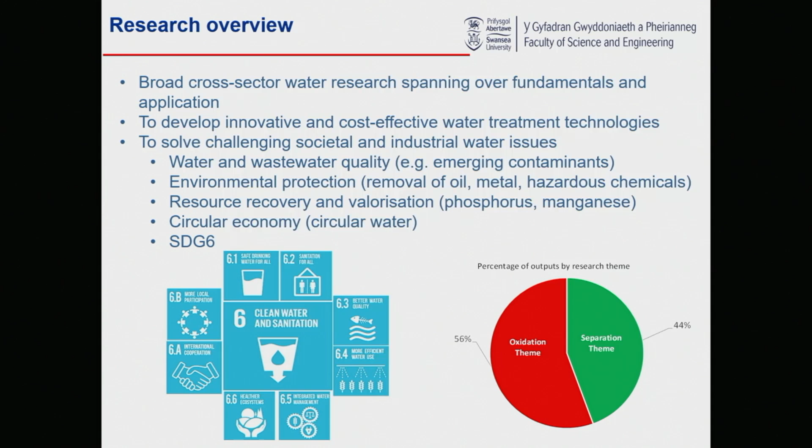The aim is to address several challenging issues related to water, such as water and wastewater quality, the emerging contaminant problem, environmental protection. We did several projects related to oil removal from industrial waste, looking at hazardous chemicals, metal issues in water. Recently, over the past couple of years, I had quite a good grant looking at circular economy and valorization of waste - that's a capital fund grant. So we have a range of equipment that we could use for this purpose.

The area of water comes under the umbrella of SDG 6, if you are familiar with the Sustainable Development Goals by the UN, and number 6 is related to water.

Our research lab covers fundamental and applied research, focusing on several oxidation techniques, mainly ozone. I've been working in ozone for many years, and I'm associate editor of Ozone Science and Engineering, the only journal that focuses on ozone research, covering European and African research related to ozone. We apply these technologies in water and also to protect the environment.

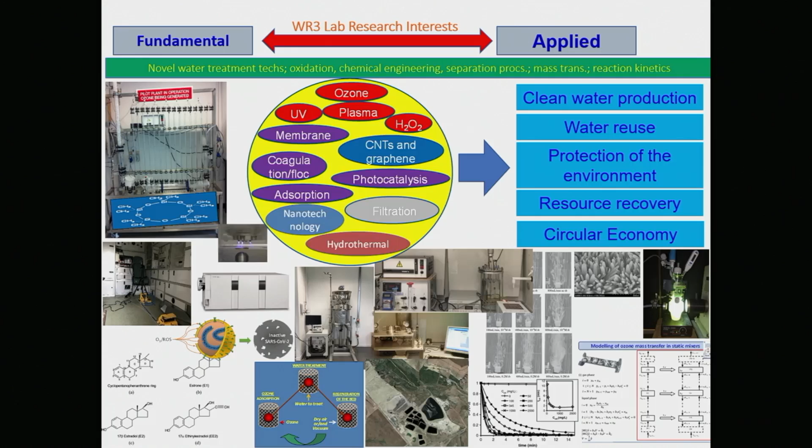This gives you a snapshot of some of the projects and equipment we have in the lab. During COVID-19, we tried to apply ozone to address the issue, and that received significant interest from the media and other stakeholders, looking at application of ozone to disinfect ambulances and buildings.

This gives you a snapshot of the areas we work on in advanced oxidation, like photocatalysis, catalytic ozonation, hydrogen peroxide, and non-thermal plasma, which I'll talk about later. Separation: membranes, filtration, coagulation, flocculation, adsorption, ion exchange, and so on. There are a number of techniques we use under the umbrella of separation processes, and these are snapshots of papers published in those areas.

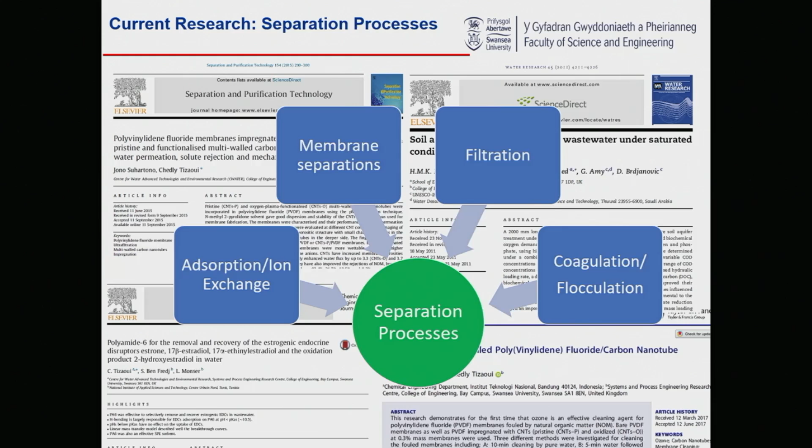Water is vital for life. We know that, all of us. We can't argue about it. It is also vital for our food, for the production of our food. It is extremely important in the manufacturing industry.

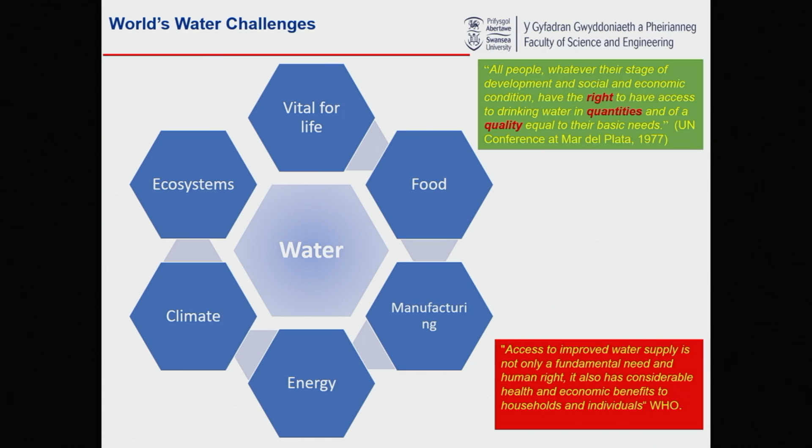Energy - the water-energy nexus is very well established. Water affects energy, energy affects water. Climate, ecosystems - and water, on a larger scale, is a human right, also linked to the economic benefit in a country. If a country is lacking water, the economy in that country would be struggling. So water is important for life, it is a human right, but also it has a huge impact on the economy in any country.

1.7 billion people live in water-stressed areas. By 2050, predictions suggest 5 billion people could be affected by water shortages across the world. 80% of the world's population live in areas with threats to water security, and that threat can be the availability of water, the quality of the water, or flooding.

In the UK, although we have plenty of water, there are risks associated with flooding. 3 in 10 people of the global population lack access to safely managed drinking water, and worse, 6 in 10 people don't have access to proper sanitation. That's extremely important because the diseases that can result from this are very significant. There are nearly 2 billion people who still use sources of water contaminated with pathogens, and 1 million people die every year because of that exposure.

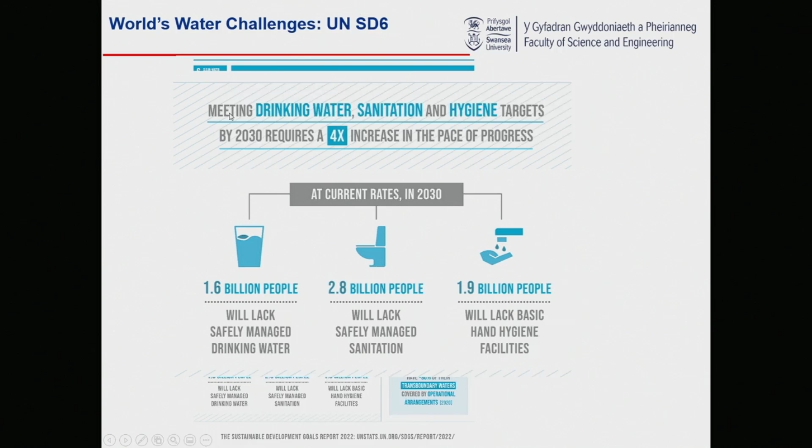If the pace goes as it is now, by 2030 you will have 1.6 billion people still lack safely managed drinking water, 2.8 billion will lack safely managed sanitation, and 1.9 billion will lack basic hand hygiene facilities. And all that is related to the water. So there is a lot to do really in order to achieve those targets set by the UN.

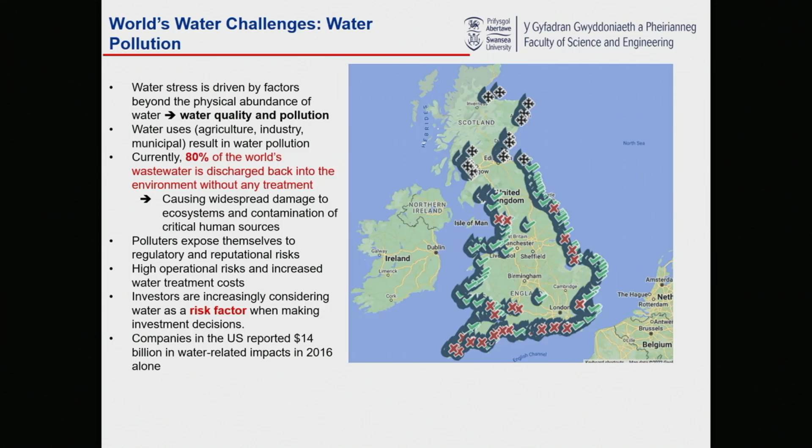It's not only Africa or parts of Asia that are affected by water, it's everywhere people are affected by water. In this map, for example, it shows the level of pollution that exists in beaches in the UK, and you can see there is quite a significant number of beaches that are polluted. On a global aspect, 80% of the world's wastewater is being discharged into the environment without any treatment, and you can imagine the impact that would have on the environment.

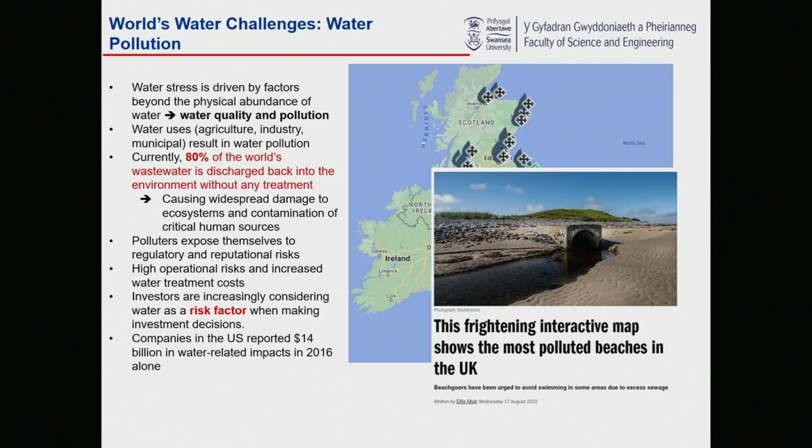Another aspect of water: investors, before they invest in whatever new project, they consider water as another risk factor they need to look at carefully, whether it be availability or the quality of the water. In the US in 2016, companies reported 14 billion US dollars in water-related impacts. So it's quite significant, whether they polluted the water and received fines. All these negative impacts, if you count them, cost the companies 14 billion in 2016. So that's a general overview.

I'm going to touch base on one aspect of the challenges related to water, which is the micropollutant challenge or issue. What are they? In the world, we have over 350,000 chemicals and mixtures that we use almost every day. They are registered, they are produced, and they are used. As you can imagine, those chemicals will end up somehow into the environment, whether it be in the air and mainly water.

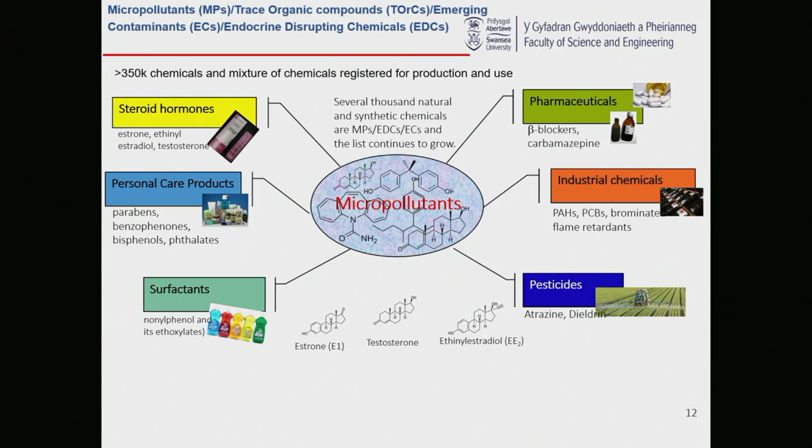So micropollutants are all those chemicals that end up in water. Generally, their concentration is extremely low. We talk about micrograms per liter and even nanograms per liter, that's 1 billionth of a gram in a liter. And these chemicals end up into the water. The list of those chemicals keeps growing almost on a weekly basis. There are new chemicals that are becoming important from an environmental point of view because of their impact in the water, or on humans, or the aquatic life in general.

So micropollutants are classified as pharmaceuticals we consume. The pharmaceuticals people take, maybe 60% of it, maybe 10% of it will be used by the body, and the rest will end up in the wastewater. Industrial chemicals, pesticides, the surfactants we use at home - every one of us will wash, and then those surfactants are classified as micropollutants because of their impact. Personal care products, and importantly, steroid hormones, which are very potent substances found at extremely low concentration, nanograms per liter, but their impact is quite significant.

Why do we bother about these? Because they cause all sorts of issues in humans and also animals. They can disrupt the endocrine system. They can cause feminization of fish, for example, which is in fact what triggered the research in this area. In English rivers, there was an issue in the 80s and 90s where fish were becoming more female, and they started to ask questions why. Simply because there is a discharge from a wastewater treatment plant that is discharging those hormones. Fish get exposed to the hormones and they became more female.

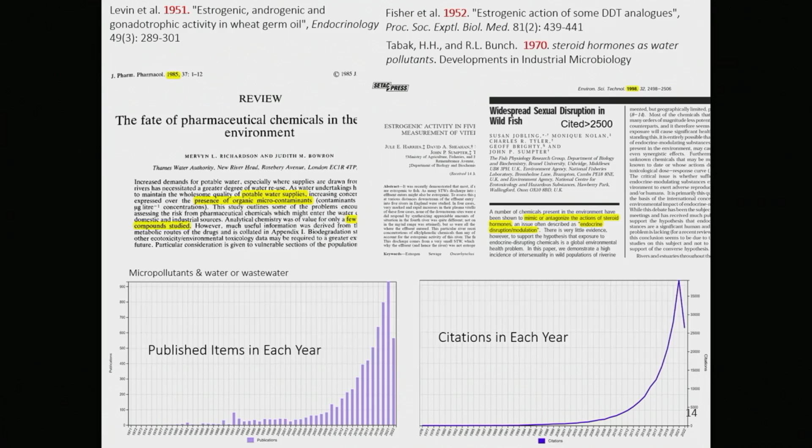One key point is that in the early 2000s - late 90s, year 2000, 2001, 2003 - there was huge development in analytical techniques, like HPLC and mass spectrometry. Therefore, researchers were able to analyze the concentration of these substances in water at extremely low concentrations.

So methods were being developed in this area, and research started to grow significantly. You can see the increase from the early 2000s for research related to micropollutants in water and wastewater, increasing at almost an exponential rate. There's a bit of a dip there, possibly due to COVID-19.

One of the papers I mentioned was about fish becoming female, by Susan Jobling, looking at widespread sexual disruption in wild fish. That paper is quite significant.

How do we get exposed to these substances, or how do they end up in the environment? All of us in the morning take showers, go to the toilet - there are hospitals, industries, etc. On a daily basis, whatever you do, you use water, and the minute you use water, these substances can end up in the water.

These substances get transported from homes to a treatment plant, a quite large wastewater treatment plant. Unfortunately, those wastewater treatment plants were designed many decades ago and were not designed to remove these substances. So wastewater comes to the treatment plant containing these substances.

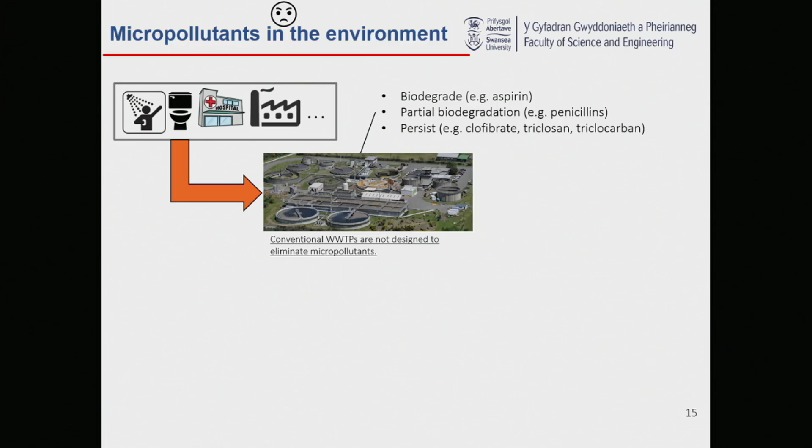Some of these substances may biodegrade there, and that's fine, like aspirin for example. Some will biodegrade but only partially - partial degradation. And some will persist; they won't biodegrade, nothing will happen to them. They come in and can come out from the treatment plant into the natural environment - a river, groundwater, or the sea.

There are other issues as well. Some industries, whether deliberate or by mistake, may discharge that wastewater directly into the environment. I make reference here to India - a lot of antibiotics are produced there, and in villages around the industries, no antibiotic can help the population, because the wastewater contaminated by antibiotics from the pharmaceutical industry discharged into the environment is quite significant. Bacteria are clever and develop resistance, so anyone from that village with an infection will find no drug effective against it.

Another issue is that some sewer pipe structures are quite old, like Victorian-type sewers. They have cracks and are not properly maintained, so they end up leaking their content into the environment as well. So the overall picture of all of this is...

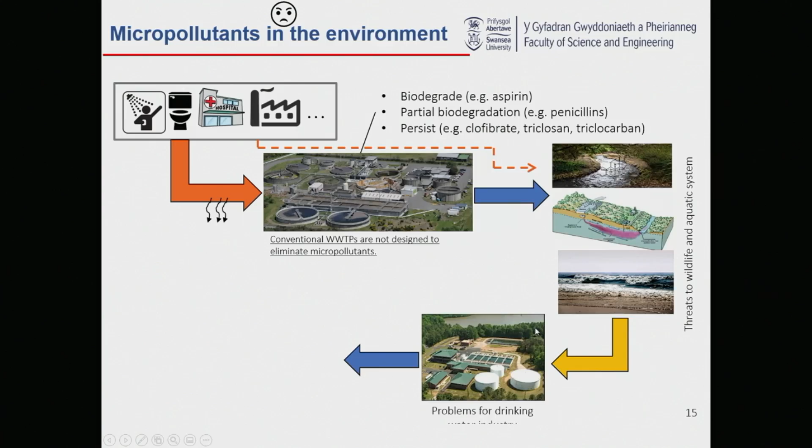You also get water from these sources to produce drinking water, and that drinking water is treated in a plant that is also not designed to remove these substances at the nanogram per liter level. Therefore, micropollutants end up in the water we drink. I'm not trying to frighten you here, but this is something that is happening, okay?

The other issue with micropollutants is that treated wastewater may be used for irrigation, to irrigate the food we eat. Those micropollutants, pharmaceuticals, antibiotics, etc., find their way into the food we eat. Also, wastewater biosolids have a lot of nutrients and are generally spread on land, which is another source of these micropollutants, so they may end up in the food we eat.

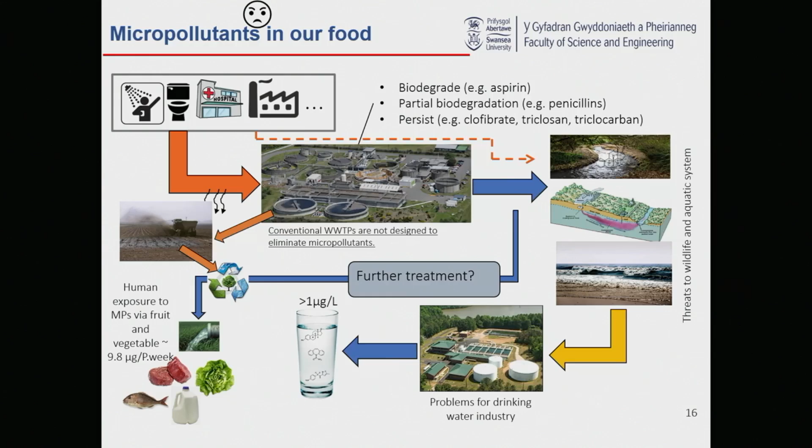Research from Spain shows that human exposure to micropollutants via fruit and vegetable consumption is about 9.8 micrograms per person per week. You may think in the UK we don't practice this, but we are not safe, because a lot of food is transported from Spain and other places in the world where wastewater is used to irrigate that food.

So the main conclusion is that wastewater treatment plants play a major role, or are the hotspot really, for the release of these substances into the environment.

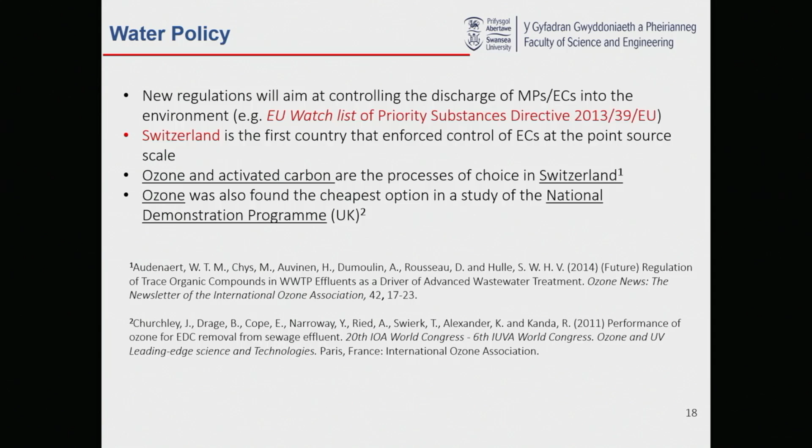If the problem is there, what's the regulation? What's the regulatory position or policy? This started particularly around the year 2000, when research started growing and the wastewater industry and regulators became aware of the issue, and regulations started to emerge to control these substances. But it really didn't go much further around 2007-8, when we had the economic crisis across Europe, which caused some delays. So the regulator did not really push for this to be properly regulated.

Instead, in the EU, they created a watch list of priority substances. The watch list basically asks wastewater companies to take samples, measure the concentration of a list of substances, and keep it on record. But they don't have to treat it, because if we aim to treat these substances in water, the water bill would become huge. So there's that issue as well.

However, the only country in the world that pushed for regulation around this is Switzerland, where their wastewater treatment plants have been upgraded with new technologies to remove micropollutants from water. One of the technologies selected is ozone combined with activated carbon to remove these substances. Also in the UK, a lot of research started with the national demonstration program, which found that ozone was a cheap option for removal of micropollutants from water. So if the economy improves, perhaps we'll have regulation forcing wastewater companies to treat these substances instead of discharging them into the environment.

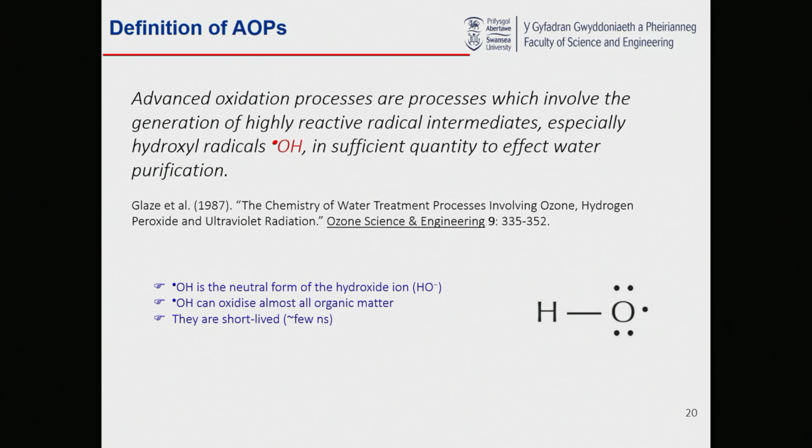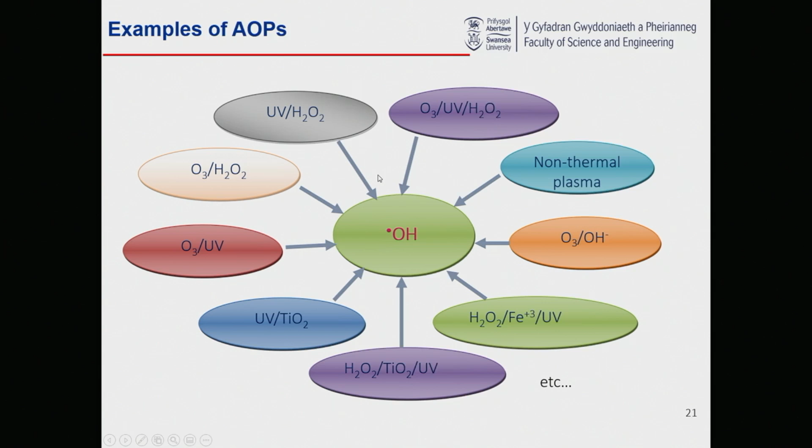To give you an idea, these species have a life of about few nanoseconds, so they're very short-lived. It's not something you can make and transport from one place to another. But there are examples of processes that produce these hydroxyl radicals, and here's a list. You combine different oxidants together and they produce those radicals. Ozone-based AOPs are quite significant and have interest from industry and the research community to address those challenges.

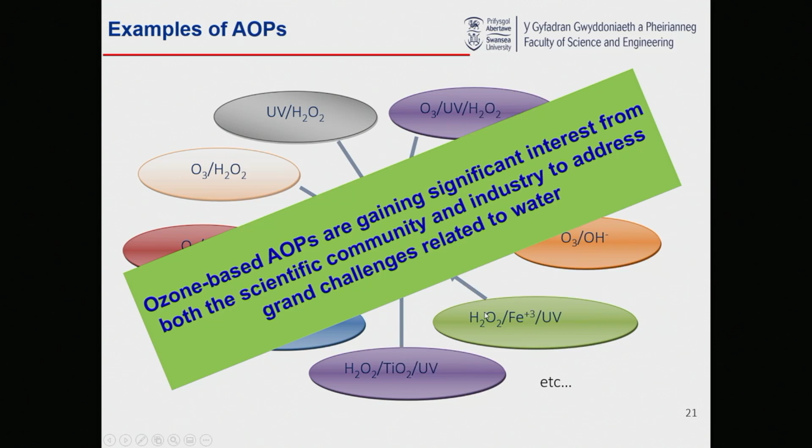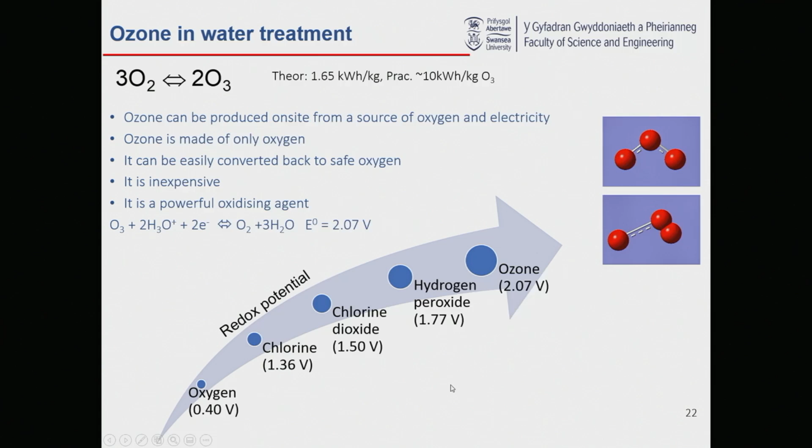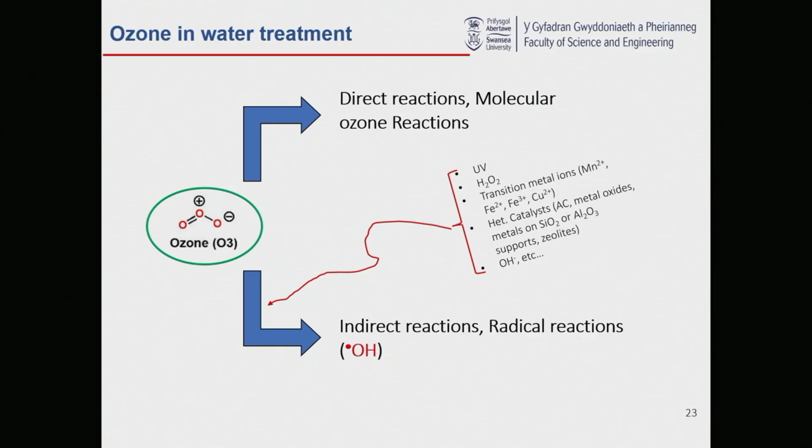Why ozone? Because it's a highly oxidant substance, the highest compared to the traditional oxidants we apply in water, even more potent than hydrogen peroxide, chlorine, and chlorine dioxide. It reacts through two mechanisms: direct and indirect reactions. The direct reaction is the ozone molecule itself oxidizing other molecules, while in the indirect reaction it dissociates in water and produces hydroxyl radicals, making it an AOP.

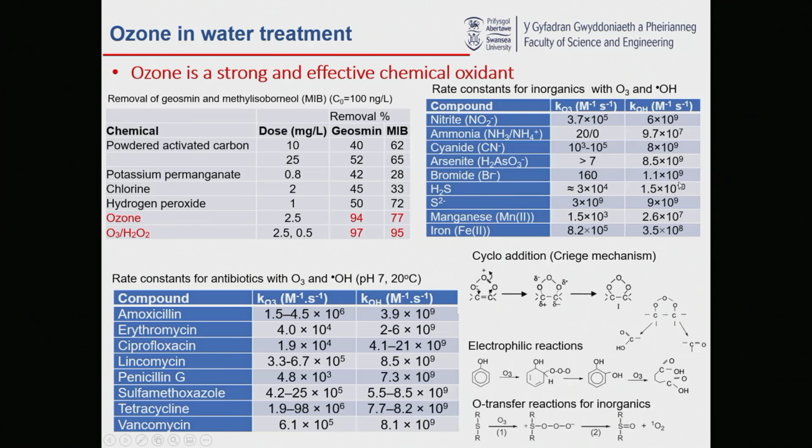I'm not going to go through all that data, but just to give examples of the importance of ozone and its oxidation power, looking at the values of the rate constants. You can see the rate constants for hydroxyl radicals are much, much higher because they are more powerful oxidants, though their concentration in water can be small.

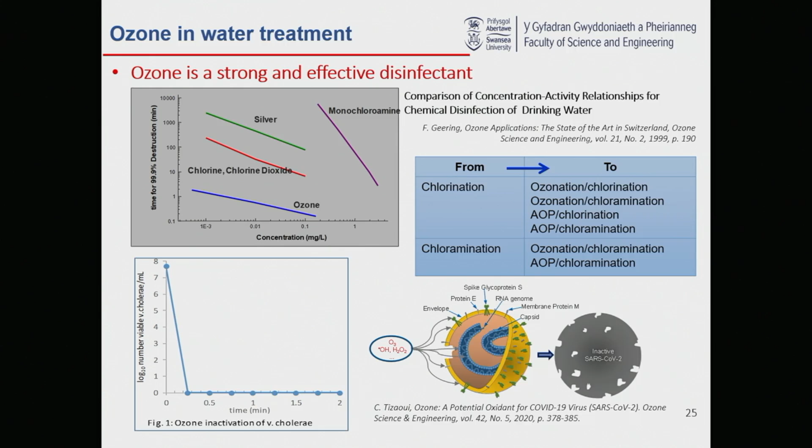This is a very interesting point as well about ozone. For example, it can kill cholera virus very quickly in less than 0.5 minutes. We used it to also kill SARS-CoV-2, and it was extremely effective. Its rate constant is 10 power 5, which is very high.

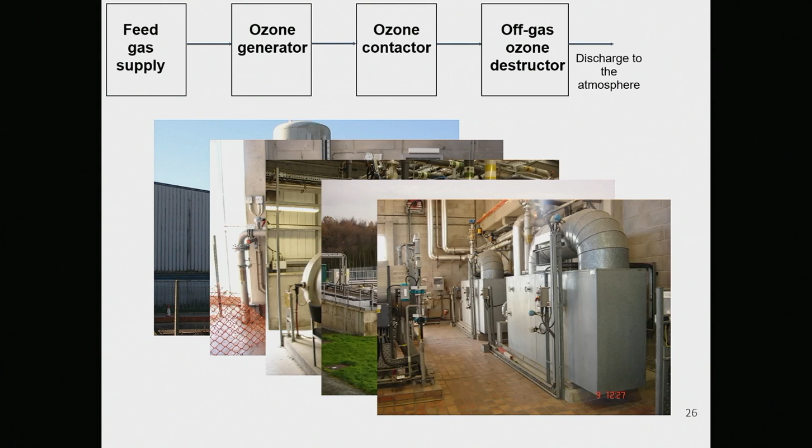The technology is established. What you need is a feed of oxygen, an ozone generator, which looks like that, and a contactor where you dissolve the ozone into the water. That contactor is about 7 meters deep in the ground, by the way. And then for safety purposes, you need a destructor before discharging the gas to the environment.

I'll give you a few examples of work we did to degrade these substances using various technologies of our research.

One of the micropollutants we looked at are the endocrine disruptors: estrone, 17-beta estradiol, and 17-alpha ethinyl estradiol. Estrone and estradiol are naturally occurring substances. Humans generate them and they end up in the toilets and then in the wastewater. This last one is an extremely potent substance, and it's the main ingredient in contraceptive pills. So this molecule is extremely difficult to degrade biologically, and its impact is quite high.

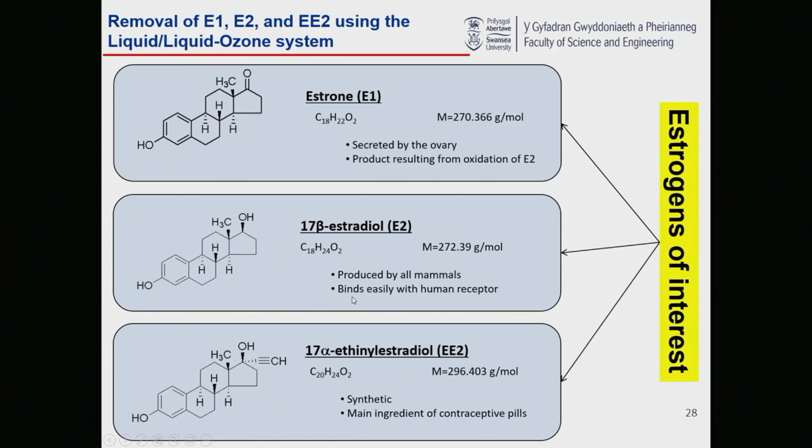I'll give you a few innovative processes we looked at. One of them is what we call LLO, liquid-liquid ozone system. In this process, we take the ozone, which is a gas, and we dissolve it in a solvent. Then we contact the water with the solvent, and we obtain treated water and a solvent being separated from the mixture.

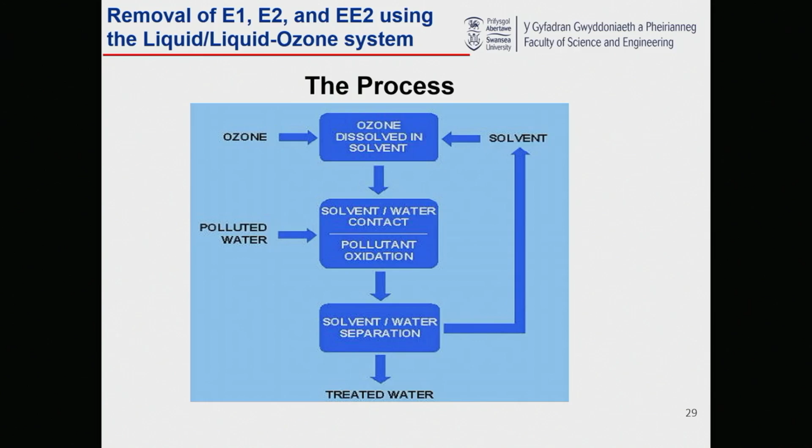The reason for doing this is that generally micropollutants are hydrophobic substances, so they have a tendency to distribute more into a solvent than water. This solvent is selected in a way to dissolve ozone at extremely high concentration compared to water, about 10 times, to give you an idea. So what you end up with is a system with highly concentrated ozone, capable of extracting those substances from the water.

And then you have two mechanisms for their removal: extraction, liquid-liquid extraction, and reaction. I'll show you the kinetics later on that resulted from that. This work was done in Yorkshire. I was in West Yorkshire with Yorkshire Water, where we collected samples from a sewage treatment works, Marley sewage treatment works.

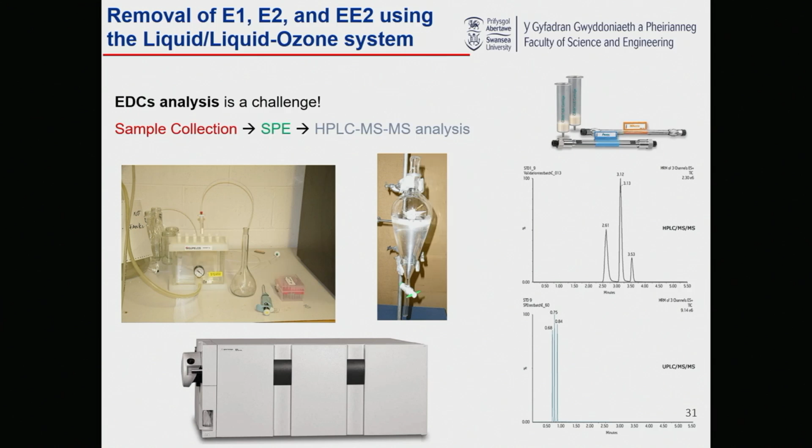At that time we had to develop the methodology to analyze these substances. As I said, they are in the order of nanograms per liter, so we needed quite a sophistication to be able to analyze them. That's the analytical method, and this is the extraction of these substances into the solvent. We can see they distribute well into the solvent.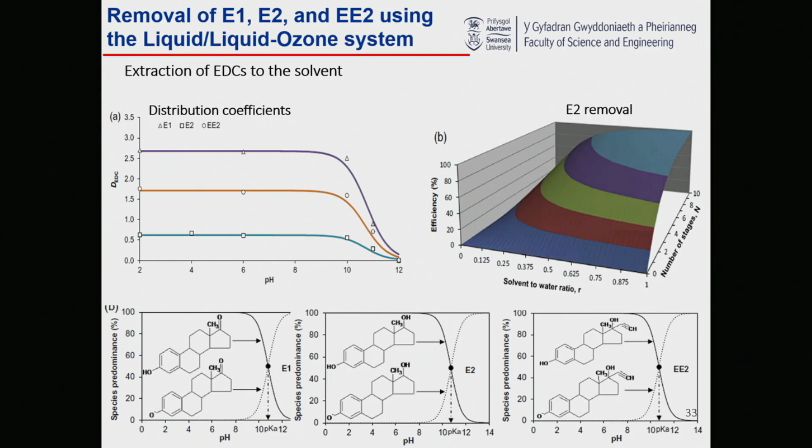And the effect of pH here is that distribution is not affected until about pH 10. That's fine, because the pKa values of these molecules is around 10. That means if the pH is below, say, 11 or 10.5, 10-ish, they are neutral molecules. If it's higher than that pKa, they ionize, and therefore become more distributed into the aqueous phase, and that is described in there.

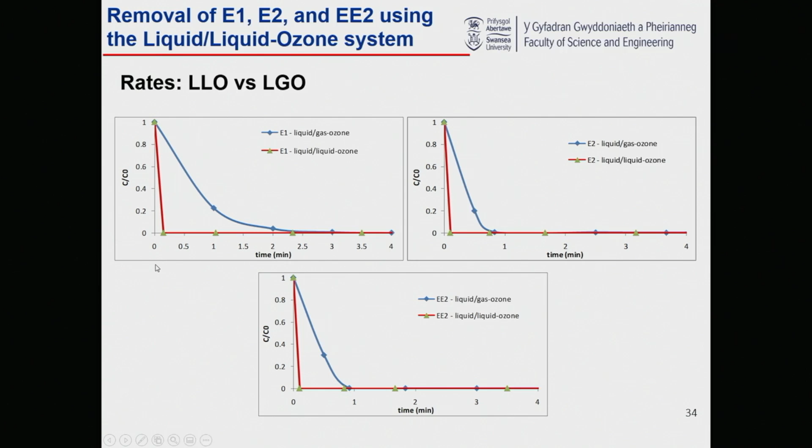This is extremely important. By applying this new technique, which involves liquid-liquid ozone, the kinetics of removal of all three substances is almost instantaneous. The first sample we collected from the experiment showed none of them, because they were extracted and oxidized with the ozone.

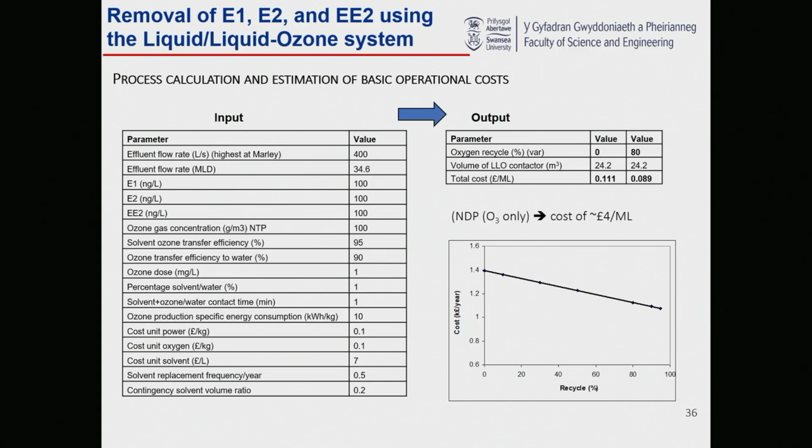This process was also costed and simulated, and we obtained a total cost for using this technique of around 0.1 pound per million liter - capital M is million, not milliliter - which is quite good compared to the National Demonstration Program figure for ozone, which was around 4 pounds per million liter of water to be treated. This is a very conservative estimation of the cost, but still, even if it is 10 times that value, it's still competitive compared to the other.

That's some publication there. This is another work. We looked at triclocarban, which is an antimicrobial found in the soap you use. It's specifically added to soap and lotions. It was developed to be used in hospitals and so on. But because of those problems, its use has started to become less and less. However, it has its cousin, if you want to call it that.

It's called triclosan, and they do the same job - either that or triclocarban are found in soap as antimicrobial substances. However, research found that exposure to this chemical can cause endocrine disruption in the same manner as the others, and also antibacterial resistance. So there is interest in degrading this substance.

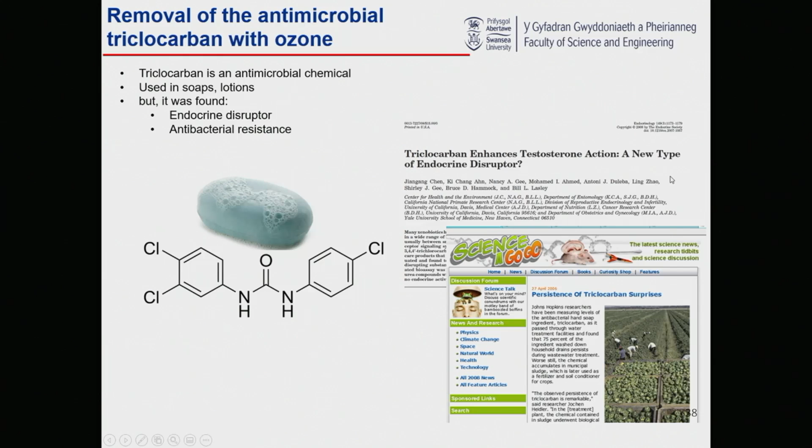We did some work with ozone as well, and we found that simply using ozone was extremely effective in removing this triclocarban from water. Obviously there's a bit of chemical engineering there - you see all these equations for mass transfer combined with chemical reactions, Hatta number, and so on. No need to go through that, but if you're interested, I teach this in Sepro too. The main point is that ozone, again, is effective to remove this substance from the water.

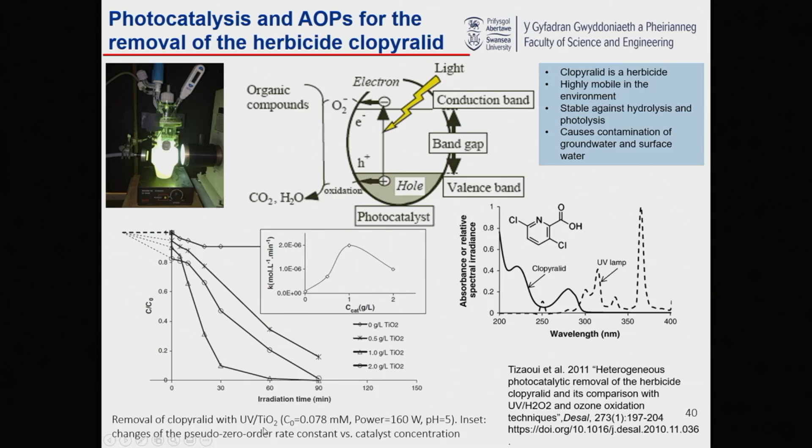Another example, herbicide clopyralid, which is a highly mobile herbicide in the environment. Why? Because it's soluble in water, and therefore it can be transferred from one area to another quickly, and that's why it's highly mobile. But it's stable against hydrolysis and photolysis, and can cause contamination of groundwater and surface water. We used photocatalysis, for example, to degrade this substance, again obtaining the optimum catalyst concentration in solution, looking at the effect of radiation, looking at the time it takes and the kinetics, and so on.

Another example is diethyl phthalate, and diethyl phthalate is everywhere. Even now, you are possibly touching diethyl phthalate, because it's in plastics everywhere. Yeah, and it's quite a serious endocrine disruptor that is also found in almost every sort of environment. So with this, I'm not sure what's happened.

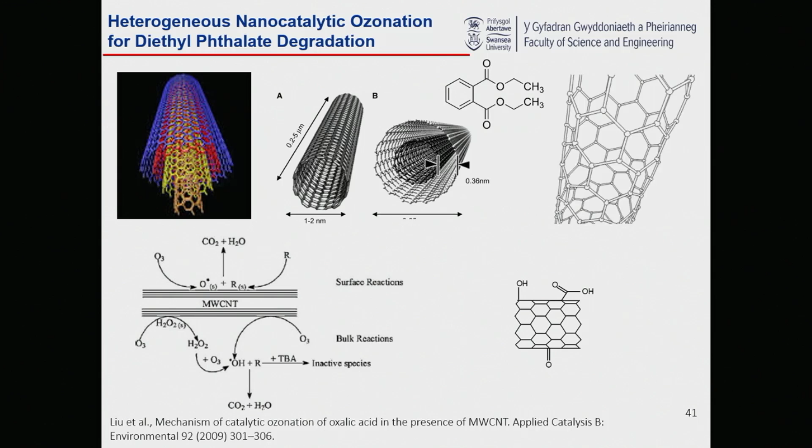Yeah, okay, so for this we used nanocatalytic ozonation, and here we combined ozonation with carbon nanotubes. Why do we use carbon nanotubes? Because carbon nanotubes can produce those reactive species I've been talking about, like hydroxyl radicals, through the contact between carbon nanotubes and ozone. That can lead to the formation of these highly oxidative species.

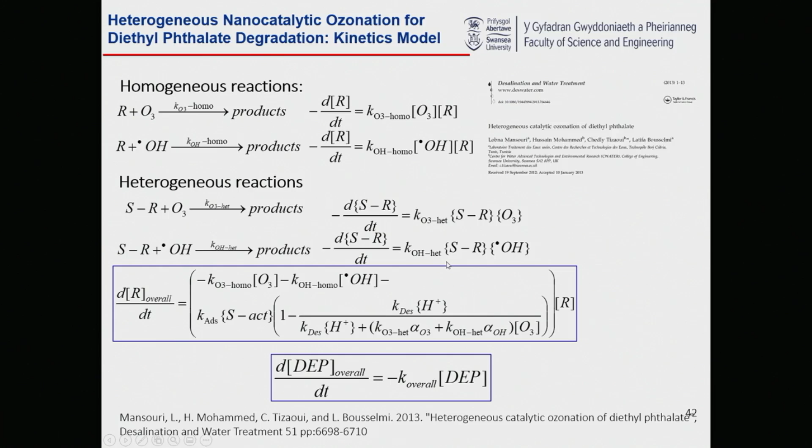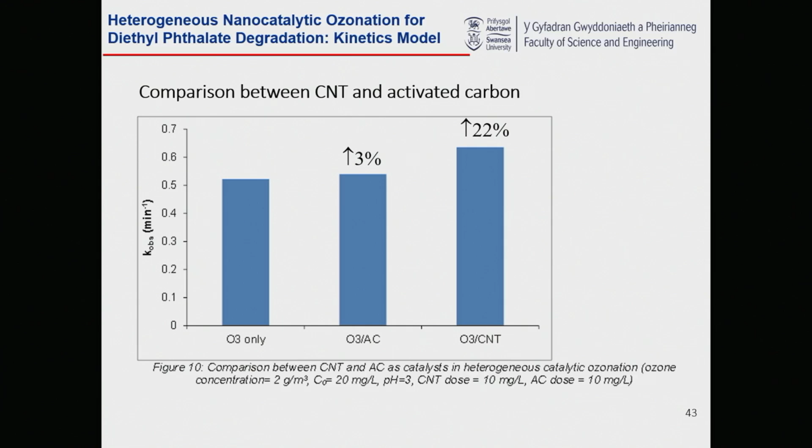We developed, obviously, a bit of kinetic work on homogeneous and heterogeneous reactions, combining the two as they develop in the process. So we described that mechanism and came up with an equation that was published. Importantly, by adding carbon nanotubes, that increases the degradation of this phthalate by about 22%.

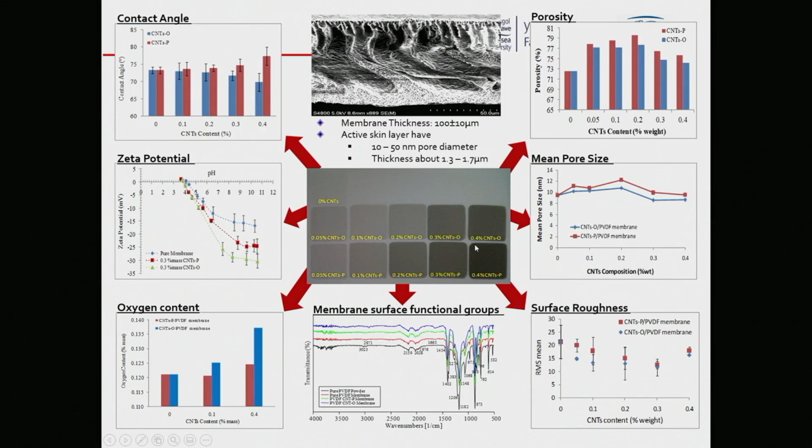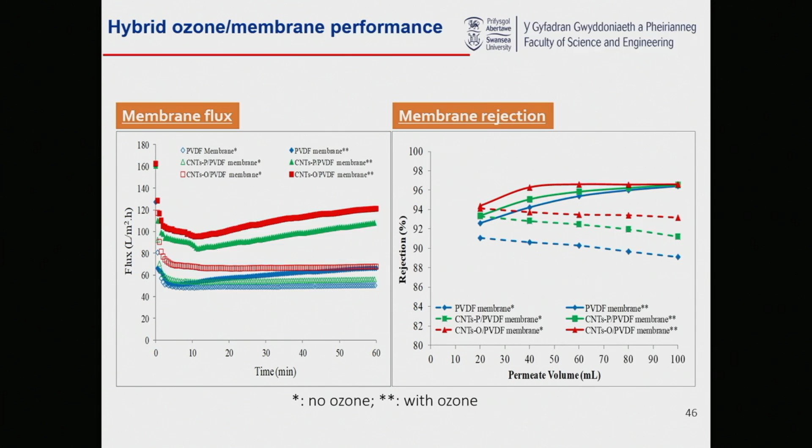Hybrid ozone membrane, this is another area we've been doing work on. We make membranes, CEDAR will be making membranes of this sort, and combine them with ozone. That's Regina's work, if you know Regina, and Juno as well - I'm not sure, maybe you guys don't know him, but they've both left. Anyway, importantly, the application of ozone with those membranes enhances the flux and also enhances the rejection of the substance that we are removing.

Non-thermal plasma. How much time do I have? 10 minutes? Okay, non-thermal plasma, so what is it?

This came from an EPSRC grant I had a couple of years ago where we built the equipment and developed this area of research. Basically, you apply a high voltage, and when I say high voltage, it's high - it can reach up to 30,000 volts, between an electrode and the surface of the water. I'm not sure if you can see that, but that piece of metal there is the ground, and the top there is the high voltage electrode.

Through this application, what's going to happen is you produce a cocktail of reactive species within that environment, and those reactive species will diffuse into the water and do the oxidation we want to achieve. So in simple terms, high voltage gives you high energy electrons - they collide with molecules, disintegrate them to produce reactive species, and those reactive species diffuse into the water and oxidize all the substances there.

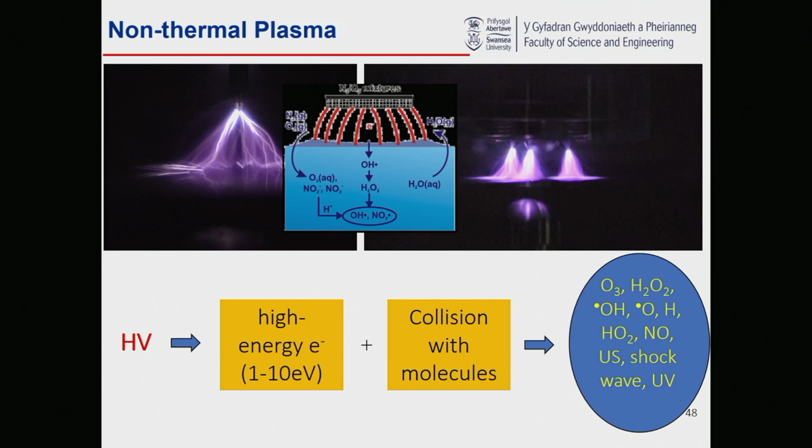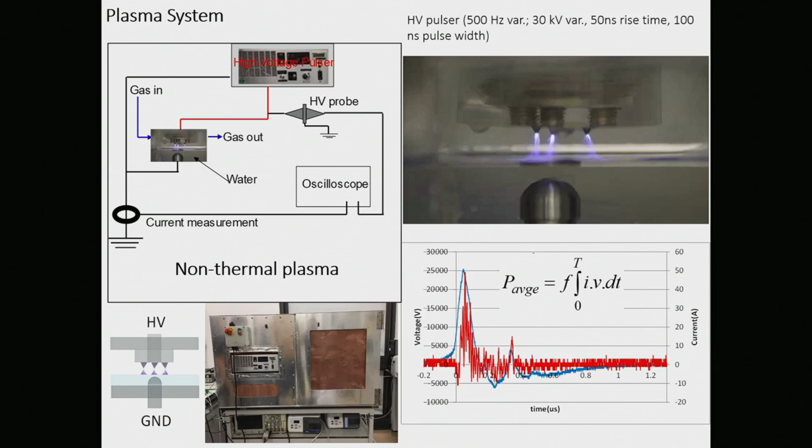The type of oxidants you produce include ozone, hydrogen peroxide, the various radicals, ultrasound, shock waves, UV - so you get really a nice mixture of these oxidative species that can be useful to treat the water. This is the system, how it looks like - that's the system in the lab. These are some of the characterizations we need to do, particularly looking at the current and the voltages that we measure.

And the work we did for this - we collected samples of wastewater from Gowerton wastewater treatment works, not very far. I'm sure you know Gowerton, it's about a few miles from here.

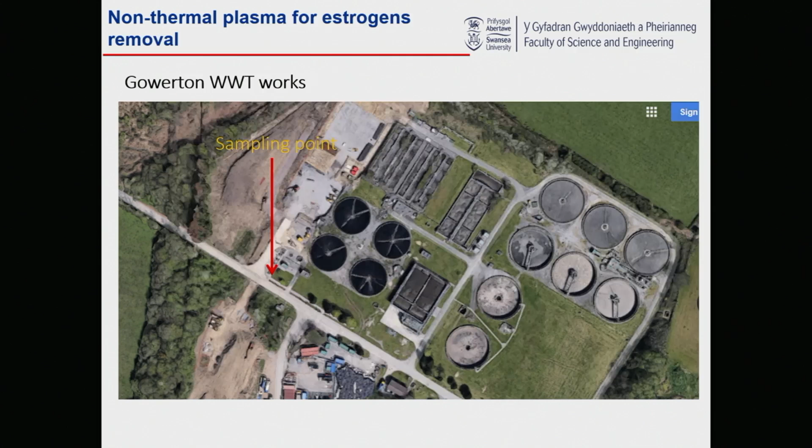And also developed various analytical techniques to do the analysis and so on. So I'm not going to repeat the same story there.

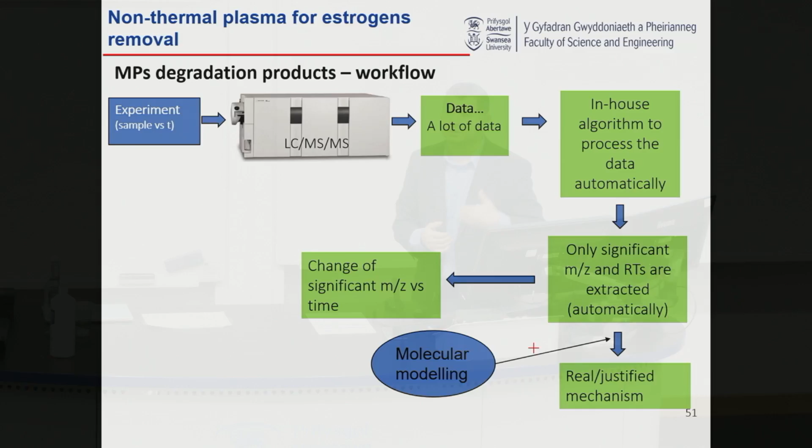But importantly here, we wanted to look at the degradation products, because so far I'm telling you that we have a molecule, we degrade it, and that's it. But what's happened to that molecule, that's another story, because you may produce other molecules that can be more toxic. So we wanted to look at what are the byproducts that are formed.

We have the analytical capabilities to measure these molecules using LC mass spectrometry, triple quad. But that triple quad will generate a huge amount of data, millions of data points. So we developed a MATLAB code that processes that data automatically to only extract the significant masses of interest to us. Okay, and all that will be automated, kind of.

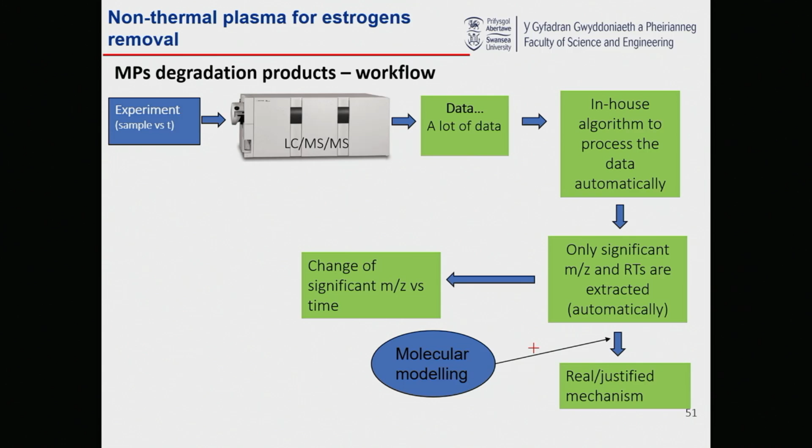Traditionally, people spend maybe weeks looking at these data to extract the information. So in here, it can be automated. And we support our analysis using molecular modeling, like density functional theory, using Gaussian, to give some insight into the kinetics and the type of byproducts being formed.

The reason for that, because when you produce all these reactive species, they change the properties of the water. And therefore, the amount of current that is passing through the solution also changes. So the water becomes more conductive.

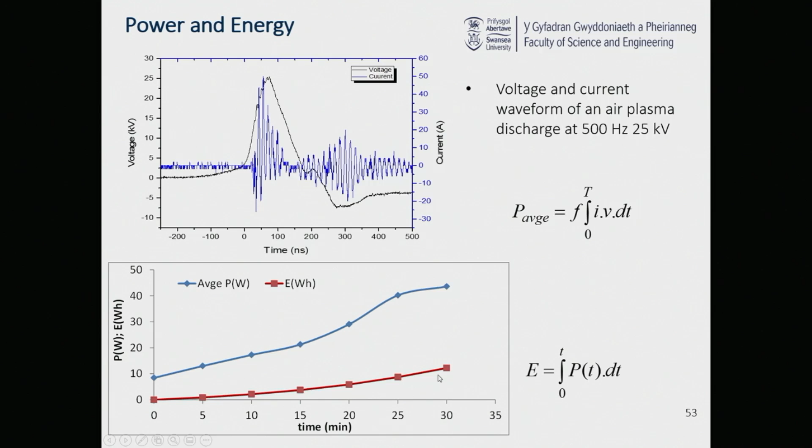But in all cases, our integration of all these powers over time gives us the energy that is delivered to the system. And that's the money you pay if you are doing this operation.

We also analyzed the reactive species produced, such as, for example, the conductivity there. The pH keeps changing, generally becomes acidic pH. The amount of ozone produced, hydroxyl radicals, hydrogen peroxide as well produced.

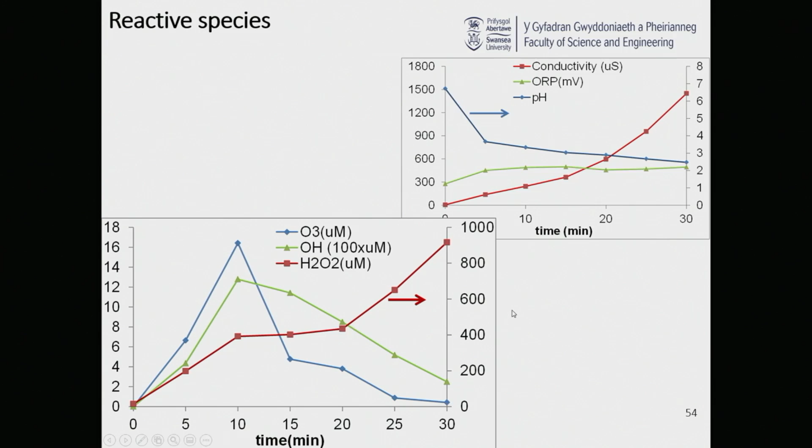And we looked at the degradation of the substances. You remember those estrogens, E1, E2, and EE2, using DI water and also real wastewater. And the kinetics, in fairness, did not change much between the wastewater and the DI water. There is obviously some change because of interference from other substances in the wastewater, but it's not that far.

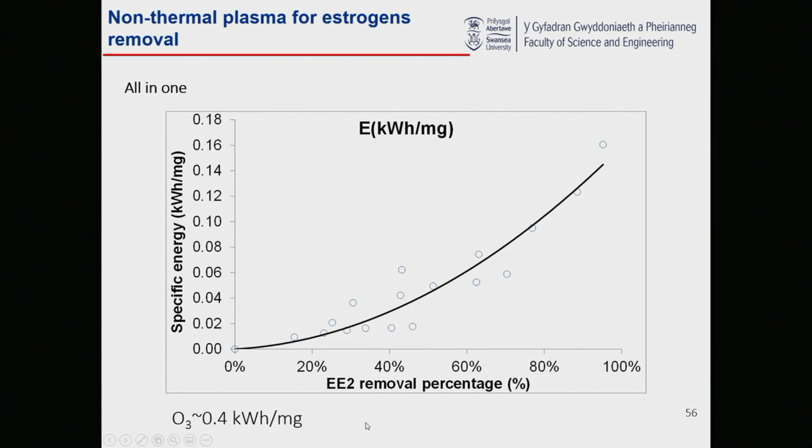We looked also at the energy that is used in the process as a function of the removal percentage. Here, ethinyl estradiol as an example.

Degradation product. So I mentioned that code will generate this sort of graphs automatically, and we can look at what mass would change over time to give us the byproducts that are formed. I'm not going to show all that, but just these are examples. And this is, for example, one of the degradation products of 17-beta estradiol, where the reactive species attacked that function of the molecule. Okay? And we can look at its change over time.

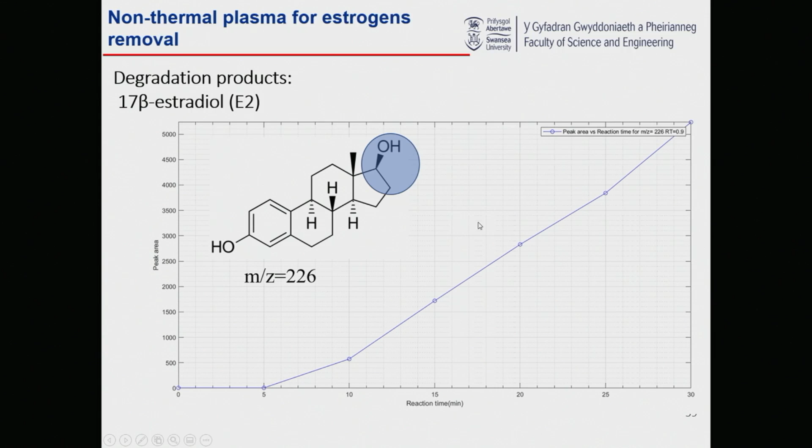Another area that I'm interested in and been doing some projects, this is one of the projects we had. It's the GCRF funding to develop technologies for water treatment in affected countries like Africa and so on.

So we had this project, SOS Water, and this is basically to develop a solar system to treat the water using solar energy. And those experiments, they were done here. You may recognize this lab, it's C0001, and we have the solar panels just inside the lab and facing the sun, and it gave results.

And this water being treated in roughly less than 20 minutes if we change the voltage. And all that was done by solar energy there.

COVID, very quickly, I'll touch on this. Yeah, that's the rapid response we had. So we had the ambulance project when we looked at its disinfection using ozone.

That was during the COVID period. We have a paper that is in the Journal of Hazardous Materials, if you want to look at it, with Cardiff University, where they did all the testing of SARS-CoV-2 over there. And we can see ozone was very effective, 7x10^5, the rate constant by which ozone attacks that virus.

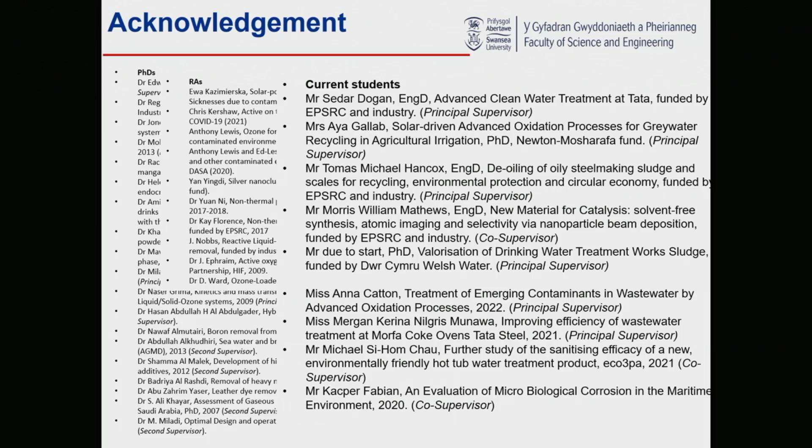Acknowledgement, some of the funders are there. Students, this list of my PhD students, RAs, current students, visiting researchers on the back—I for some reason didn't show—and some of the collaborators as well.

Thank you. So do you have any questions?

Thank you, Chedly. I think it's remarkable and fantastic. I learned a lot. And excellent. Hopefully we'll have some questions, but not too many.

I knew you were going to ask something, yes. So the solvent we're using, is it carbon-based? Because why doesn't the ozone just react with the solvent? Very good question. So it's not carbon-based, it's siloxane-based. So ozone does not affect it, it keeps stable on it for some time. But that's one of the areas we'd like to look at—after long exposure of that solvent to the ozone, are there reactions that would take place? Theoretically not, but we need to prove it.

So does it not mix with water? Does not mix, yeah, that's a very good point as well. So is it like an emulsion then, like oil—do you mix it up in emulsion with small droplets? The idea is it should not be mixed.

This is the rig, in fact. That gives you an idea about this. So that column there—the solvent will come from the top and the gas ozone from the bottom. So that solvent gets saturated, and then we introduce the wastewater at that point, and they will mix in this about 10-meter long reactor. And we have some static mixers to mix the two together, the aqueous phase and the solvent phase.

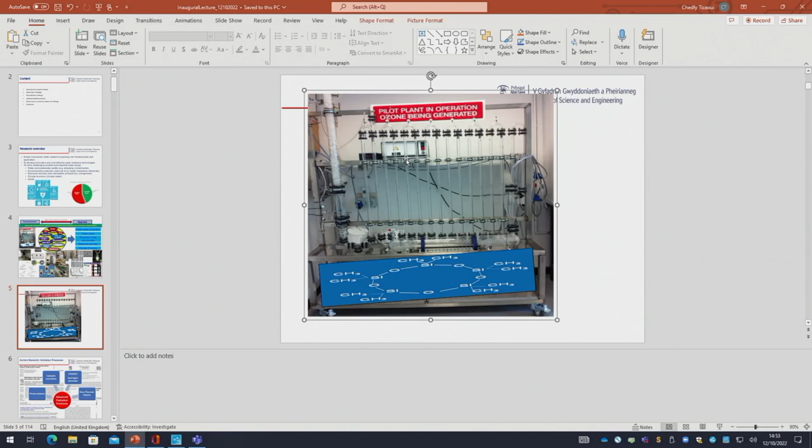Thank you, Chedly. I also learned a lot. So now you need to take something that is present almost at the nanomolar level to what level then?

Yes, very good. So there is a lot of research going on in that area to determine what we call the PNEC, the predicted no-effect concentration of each of those substances. You can do it for a single component, and then you find, for example, for estrogens, about 1 nanogram per liter. But if they are in mixtures, they may not add up in those PNECs. Now, to answer your question, it would depend on the molecule we are looking at. There is a lot of research going on to find the values of the predicted no-effect concentration for each of these substances.

Oh, my next question—we shouldn't keep asking questions. I think it's fine. Outside, okay, during the refreshment session, because we have another lecture coming up after this. So I think perhaps we can continue outside. Is that okay, Enrico? Sorry. Yeah, absolutely. Apologies. No, that's all right, because we are running out of time.